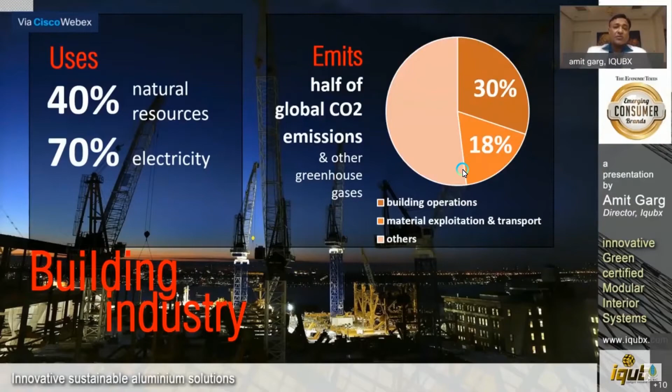It's emitting more than half the global carbon dioxide emissions and other greenhouse gases, whether we consider building operations, pre-construction, or post-construction. More than half the global carbon dioxide emissions are because of the building industry. In fact, building materials embody a major component of energy consumed in a building, which is called the embodied energy.

For that to happen, we have to look at what materials go into making a building. So till now, traditionally, we were looking at 3 major factors for material selection in buildings, for the architects and clients, the various stakeholders. One was the functional aspect—every material is very suitable for the function it is supposed to serve. For example, if you need a glass partition, you look at a glass material. If you need a wall, a different material will be required.

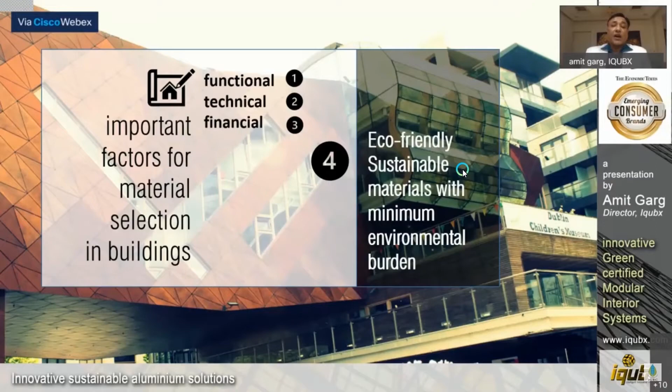Then, of course, there is a technical aspect to it, and a third financial aspect of material selection, which is how much is the price per unit and how much it can be afforded as per the budget of the project. But the fourth aspect of material selection, which is eco-friendly, sustainable materials, is what is becoming now important, and it is the need of the hour with minimum environmental burden.

Sustainable building material, to my mind, is almost as if we are talking about the sustenance of life on Earth. But what about the criteria for building material selection for sustainability? There can be many criteria for such a material. For example, it has to be low maintenance, and minimum energy has to go into the production of the material in the beginning.

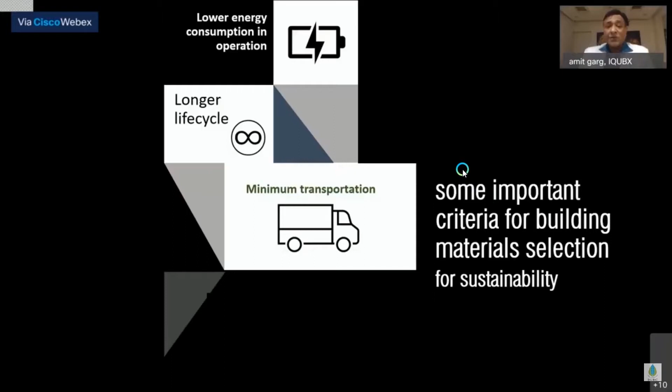Lower energy consumption during operation, throughout the life cycle of the product, is very important. The longer the life cycle of a product, the better for the environment, because it doesn't need to be replaced. Minimum transportation is also key—transportation contributes a huge amount, 18%, in the building industry sector to the energy cost. Therefore, if we're talking about minimum transportation cost, we're talking about minimum emissions. And of course, we're talking about easy and fast installation.

As well as inert and low emissions for indoor air quality, these are some of the very important criteria for building material selection. But there are some other criteria as well.

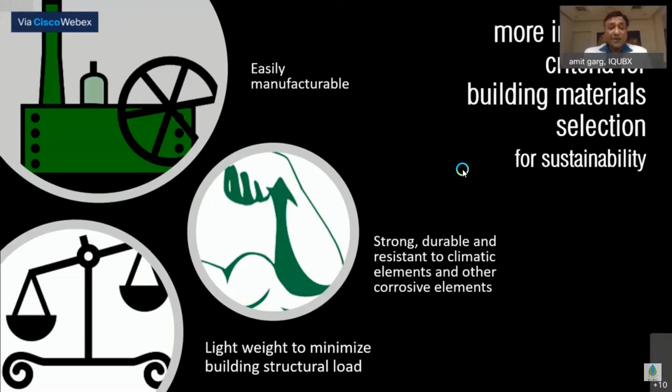For example, the easy manufacturability of a product, which is very important, the strong, durable, and resistance to the climatic elements and other corrosive elements, which will enhance the life cycle of the product. The lightweight to minimize the structural load, which becomes very important. And one of the very important criteria of such a material can be the recycled component in the existing material that we are proposing to use.

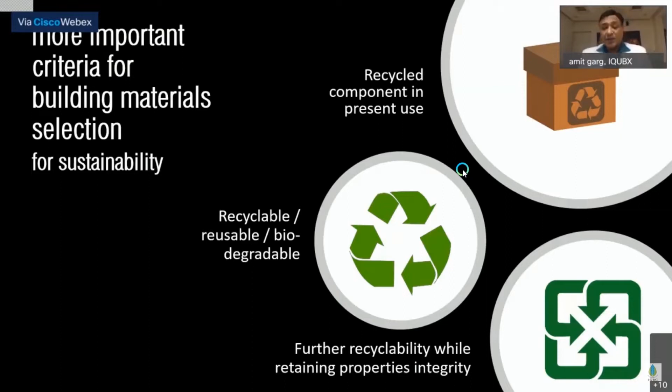Secondly, what are the recyclability possibilities? And secondly is the further recyclability. There is a perpetual recyclability, the possibility of that. Because there are some materials which I'm going to propose now, like for example, aluminium, which is a sustainable wonder material to my mind, which is perpetually recyclable. It is the third most common element on our planet, just after oxygen and silicon, and makes over 8% of the Earth's crust. So it is a material which is in abundance.

The material is extremely versatile and is being increasingly used for a variety of applications in the construction industry. So, but why aluminium? Why would we call it wonder material? Because it is a very, very light material, just 1/3 the weight of steel. But in spite of that, even though it is half the weight of the steel, the stiffness is the same.

The weight of the aluminum structure is almost half to 2/3 the weight of steel structures, and 1/7 the weight of reinforced concrete structures. Now, this is going to reduce tremendously the transportation costs and therefore the carbon dioxide emission. And we are also talking about reduced human labor for handling all that building material.

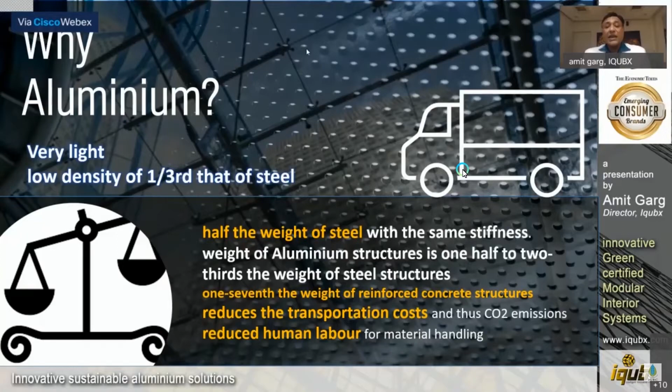Aluminium is very, very strong and durable. It means less breakage and thus minimum replacement and maintenance. It is non-corrosive and non-rusting. It can be given virtually any desired shape. It's highly manufacturable and it can be used in any climatic conditions. It does not promote growth of microorganisms, which is suitable for use in clean rooms and hospitals.

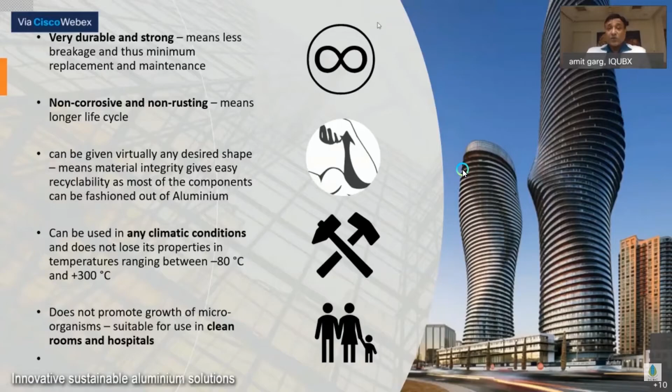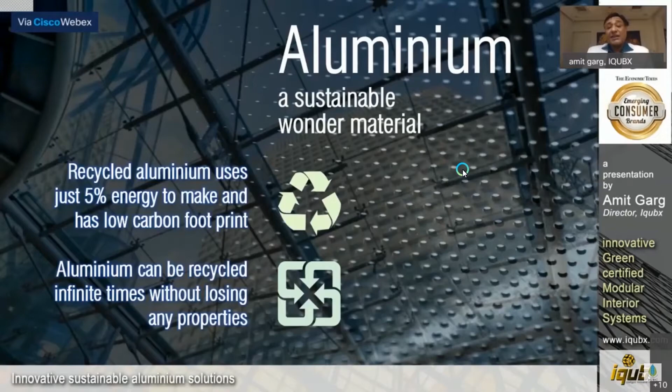Another important aspect of aluminium is that it is highly manufacturable with precision. It can lend itself for die casting, pressure die casting, extrusion, rolling, so on and so forth. But then why would we call aluminium a sustainable building material? Because it takes a huge amount of energy to produce virgin aluminium. Now the secret lies here, that the recycled aluminium uses just 5% to make and has a very low carbon footprint.

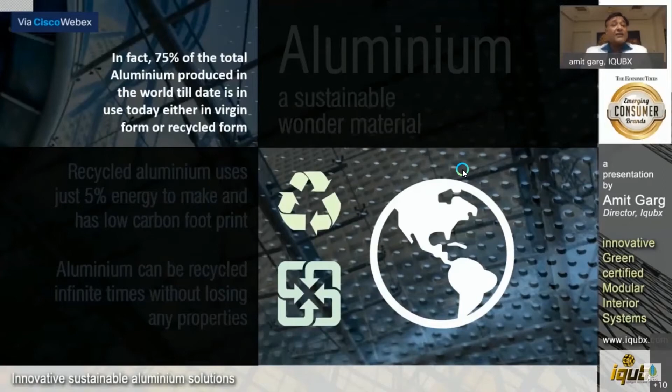And aluminium can be recycled infinite times without losing any of the properties. Now, you would be surprised to know that in fact 75% of the total aluminium produced in the world till date is in use today, either in its virgin form or its recycled form. This makes aluminium an amazing sustainable wonder material. It is 100% recyclable, infinitely recyclable without any loss of properties, 5% energy cost, plus it is durable and strong, plus it is inert, highly manufacturable, very light, very long life cycle, low maintenance, and that's why we call it the metal of the future.

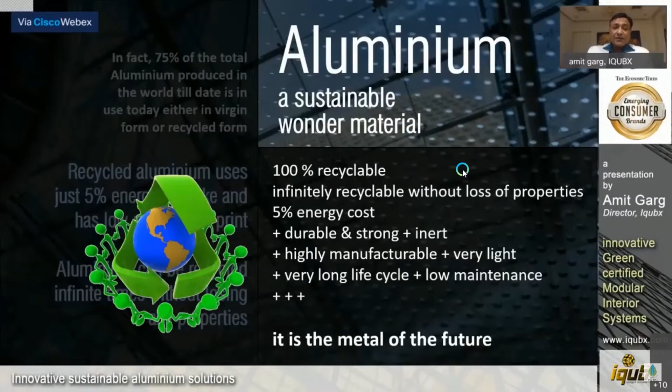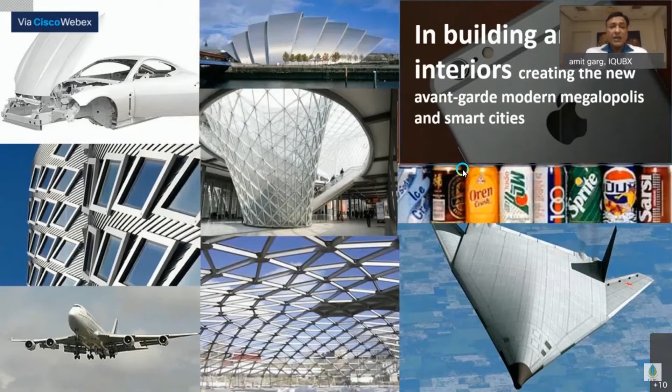And to my mind, it is very conducive to innovation. It inspires innovation. If you have noticed, the world over, there are so many objects of daily use which are made up of aluminium. If you look at your laptop chassis, if you look at your mobile phones, if you look at aircrafts, the building facades, the structure of the building, even the cans of beer and the soft drinks that you take. In fact, various iconic structures owe their existence to aluminium, which is actually quite amazing.

If you look at the Ferrari World, which is a giant entertainment park in Abu Dhabi, it's one of the largest aluminium roofs in the world with 2 lakh square meters. I'm talking not of square feet, but lakh square meters.

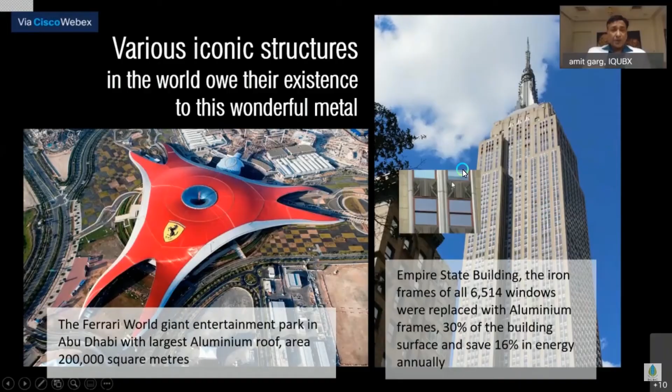We're talking about Empire State Building, the iconic building, where all the iron frames of 6,514 windows were replaced with aluminium frames in 1993, I believe, and 30% of the building surface. And now it is saving 16% annual energy because of this fact.

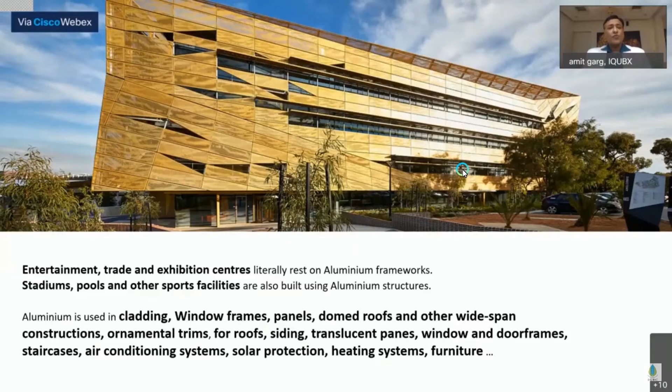The glass facades of the office skyscrapers are often supported by lightweight and sturdy aluminium frames. If you look at most of the buildings, entertainment, trade and exhibition centers, stadiums, pools, and sports facilities, you have aluminium being used in so many components like cladding, window frames, panels, dome roofs, wide span constructions, ornamental trims, so on and so forth. Even air conditioning systems, solar protection, heating system, and the list goes on and goes on.

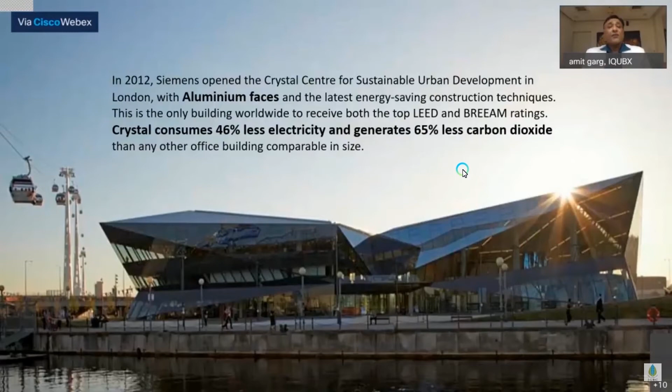In fact, in 2012, Siemens opened the Crystal Center for Sustainable urban development in London with aluminium faces, and it consumes 46% less electricity and generates 65% less carbon dioxide, and is one of the buildings which has the coveted LEED as well as the BREEAM ratings. Both of the ratings have been achieved by it.

Aluminium was one of the key materials which was used in this Laura Biathlon stadium, and which was used for the 2014 Winter Olympics.

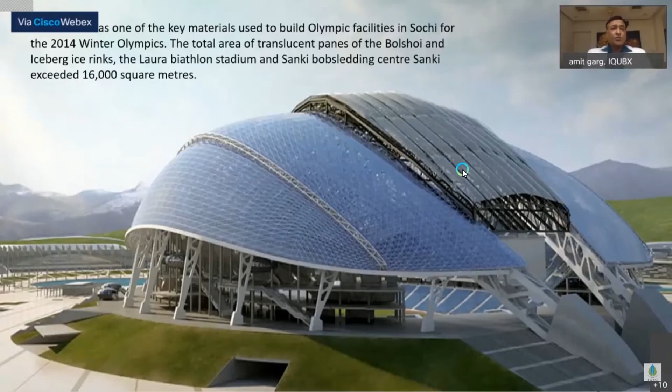Having said this, the design possibilities in this material are only limited by imagination. So, to my mind, when we're talking about a sustainable building material, aluminium is one of the very good contenders, a sustainable, high-performance, innovation-inspiring wonder material which can become very important for sustenance of life on Earth. We at Iqubx have full belief in this conclusion, and we strive to produce very sophisticated, highly innovative, modular

interior systems for our clients, which are very sustainable at the same time. In fact, we have become one of the largest, with the largest portfolio of green certified modular interior systems in India. And we have also won the coveted Emerging Consumer Brand of the Year. Slowly, architects and designers are becoming conscious and aware of the amazing benefits this can bring to their projects.

So our systems are very innovative and sustainable, giving a very high value proposition to the users. In fact, we consider not just the end users as our client, but the environment as an equivalent stakeholder. We have made it part of our agenda to make every solution that we propose to clients very

sustainable. We invest in innovation and sustainability in all our solutions, both for the end user as well as the environment. The first way we do that is by using 100% recycled aluminium. We are thereby protecting the environment, as well as using the amazing properties of aluminium, through which we are able to propose innovative solutions for our clients and help them meet their sustainability

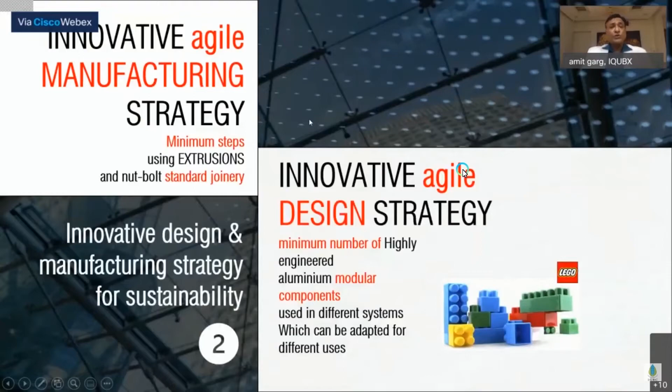Through these two combined strategies—innovative design and manufacturing strategy for sustainability—for the first stakeholder, the environment, we are helping reduce the time, cost, and energy footprint of our product system development.

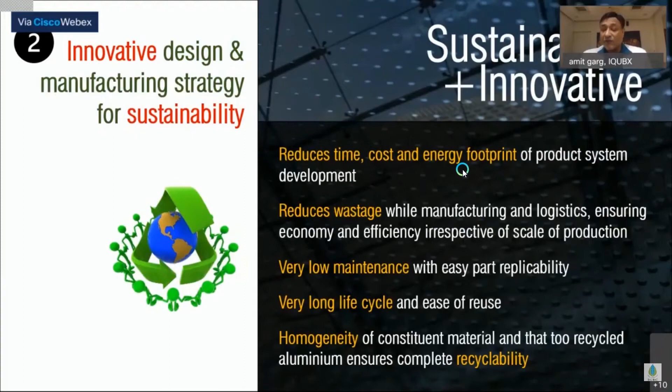We are reducing the wastage that normally goes into product development, achieving very low maintenance as part and parcel of our products, a very long life cycle which enhances sustainability, and homogeneity of the constituent material—that is, recycled aluminium—which makes our products highly recyclable further, which is something very important to understand.

Now, the second stakeholder, which is the end user—there are a whole host of benefits that we bring to the table. First, it saves a huge amount of money.

That is primarily also because we make it in India, with reduced development cost and reduced labor involved. It saves a huge amount of time, and we can bring down the installation time of interior projects from many weeks to just a few days, simply because of the design sophistication, the quick turnaround time, the scalable manufacturing techniques we use, and the

very fast installation details we have developed. And it saves a lot of human labor, which is particularly important in COVID times, since it can be installed with minimum human labor. It also saves investment, because all the products are highly customizable, modifiable, and relocatable as per the future requirements of clients, and that is the reason

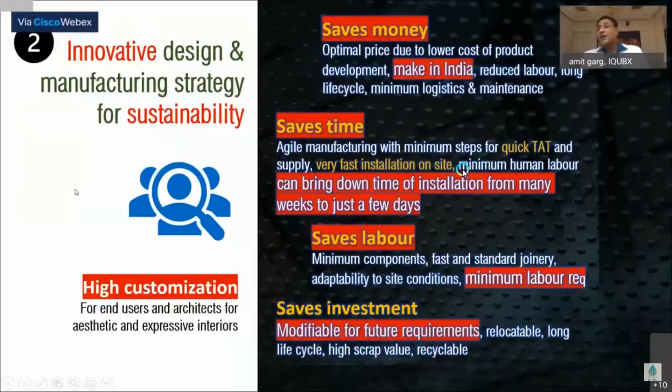we are delivering a very highly innovative and sustainable solution for our clients. We have more than 20 products with more than 70 variants. In fact, we have been awarded more than 70 GreenPro certifications for all our products till date.

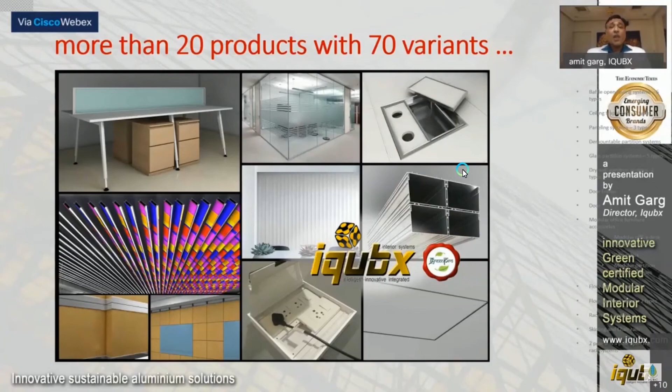I would just like to give you an example of what I was talking about, like Lego blocks. We are playing around with components and systems to deliver different solutions for our clients. For example, the first image on the left is a patent-applied floor junction box which takes on any finish on the flooring, be it stone, tile, carpet or anything, and this can be made into any size and any load bearing capacity as per client requirement. So this is a patent applied, very simple solution with just 3 components.

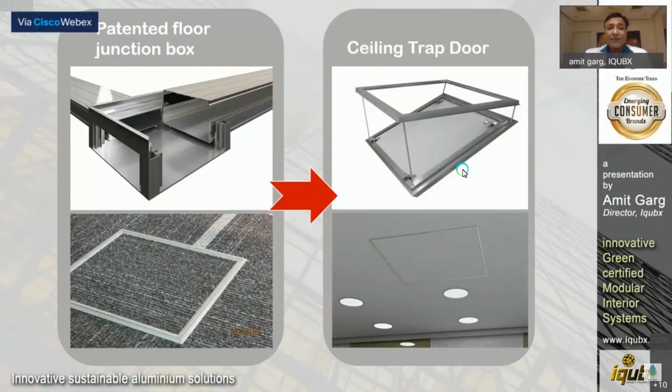And from this solution, we jumped to a ceiling trapdoor. By using the same components, we have delivered ceiling trapdoors, which you can see on the right. So that is what I would like to say, how we are adapting one system and delivering a second system.

Now I would like to share with you an amazing story which I myself find amazing. A couple of years ago, we approached DMRC, Delhi Metro Rail Corporation, to use our products. They forwarded us to Siemens, their partners in the project for signaling equipment. In particular, they were searching for developing an open frame rack system called a cable termination rack, cable distribution rack, for almost 2-3 years, and had been speaking to a lot of companies, but the solution was not in sight. They wasted a lot of time and money. When we approached them, we said, okay, we will deliver the solution.

We delivered in just 3 months, and we could replace the high value imports from Germany and Japan. Siemens said it is a feather in the cap, and DMRC said it is better than the imported Japanese and German systems. So we developed this for DMRC and Siemens.

Now, the image that you see on the left - but that is not the story. That's the beginning of the story. By using the same open frame rack system, which is nothing but assembling very high bending strength components with standard aluminum brackets and Allen nut bolt joinery.

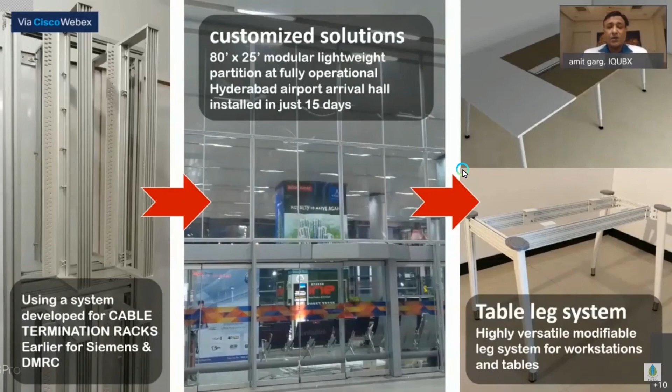In 2018, at Hyderabad, in this IGBC conference, I think it was November, we had put up an exhibition. We were awarded 23 certificates that day, and GMR Hyderabad people were there in the exhibition. They saw us, talked to us, invited us off the exhibition, and needed a very urgent solution because it was an audit requirement from the customs department to develop a 25 feet high and 80 feet long transparent glass partition system between belt number 2 and 3 and the arrival hall, because both belts belonged to different areas - one for domestic, one for the international airport.

We could deliver the solution in just flat 15 days, and install it in the highly sensitive operational environment of the airport. The system we used was the same system we had developed for Siemens and DMRC for installing the sophisticated signaling equipment for the metro rail.

So the same system we could adopt for our amazing leg system for workstations. We have got modular glass door and frames. We've got demountable partition and paneling systems. We've got this amazing drywall cladding partition system in which you can have the wet areas in the room partition installed overnight, which can change the entire face of infrastructure.

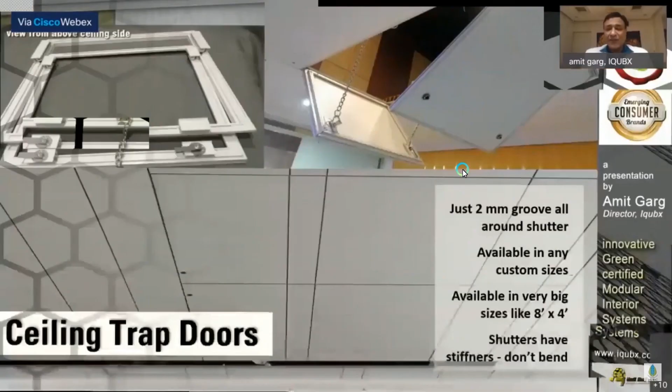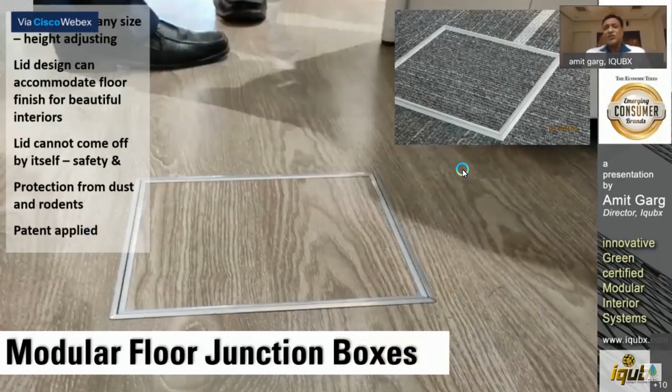We have amazing hot selling ceiling trapdoors, big sizes, 8 feet by 4 feet, built custom as per your requirement. We've got modular table leg systems which can be modified from one single configuration to 6 configurations as per your requirement. Amazing patent applied modular floor boxes and floor junction boxes.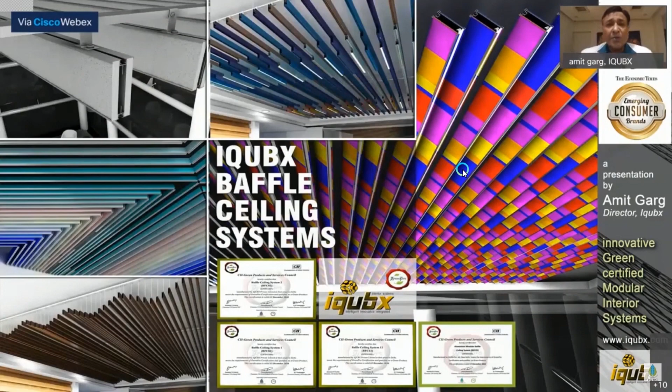Amazing baffle ceiling systems, again patent applied and full of innovation. So we are manufacturing various other products which can find use and add value to your projects. We have got a lot of big clients and big industry players approaching us for solutions, and we have been able to satisfy them. So that's how IQUBX is.

I think it is the epitome of sustainable, innovative aluminum solutions. Using aluminum, we can make a big impact on our environment, our industry, and our country. Thank you, IGBC, for this amazing opportunity to present my views and my thought processes to the world.

Thank you. Thank you, Mr. Amit. I had a few learnings from your presentation - that aluminum is the third most common element in the world, I did not know that. So thank you very much for enlightening us. Aluminum, no doubt, is a wonder material, and I think with your creativity, you have made it even more wonderful. Thank you so much.